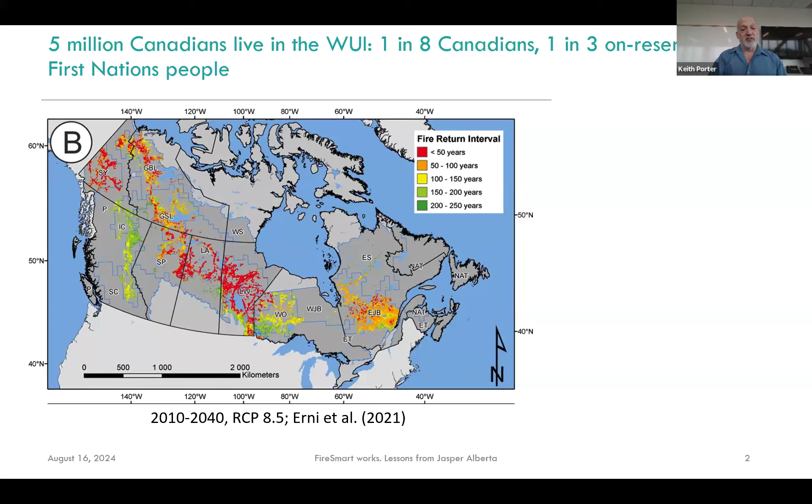So the red dots are places where there is a wildfire in the wildland-urban interface at least every 50 years. That is to say, there's a 2% chance in any given year that a place in one of those red dots is going to have a fire. A yellow dot means roughly 1% chance, and a green dot means roughly 0.5% chance. So we're talking about fairly likely outcomes when you consider that there are a lot of places in the wildland-urban interface. So we can expect to see wildfires affecting communities pretty frequently.

The key features of wildfire resistant homes, the features that FireSmart advocates and that other experts advocate, are shown in these two pictures. The one on the left is mostly focused on what we do to the building. The one on the right is mostly focused on what we do to the yard and the landscape around the building, the vegetation around the building.

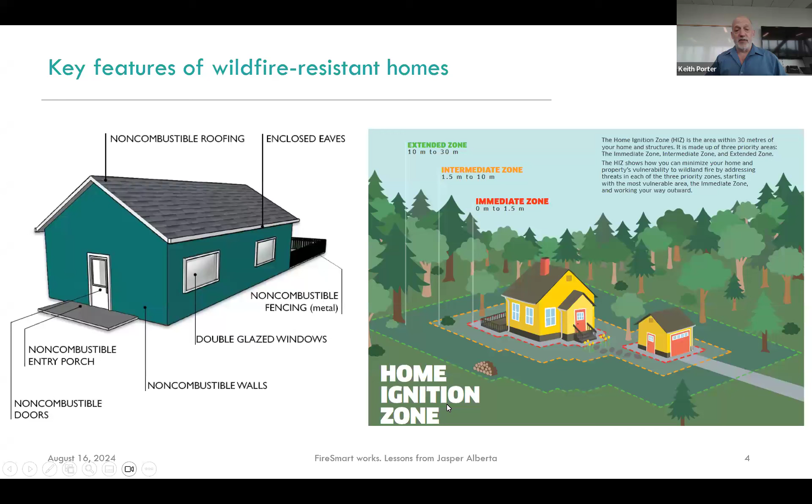I'm not going to talk much about the extended zone that goes out 10 to 30 meters, because few if any of the houses in Jasper had any control over what was going on in the extended zone. Now, I'm going to tell you lessons from Jasper, but there's really nothing new in those lessons. We have seen over and over again that where we apply those principles, the buildings survive.

The image you're seeing right here is from the 2018 Paradise wildfire in California. It is the home of the Hare family. The building that is in the lower part of the screen complied essentially with all the same requirements that FireSmart calls for. This building was governed by the California Building Code, but the California Building Code uses many of the same requirements as FireSmart does.

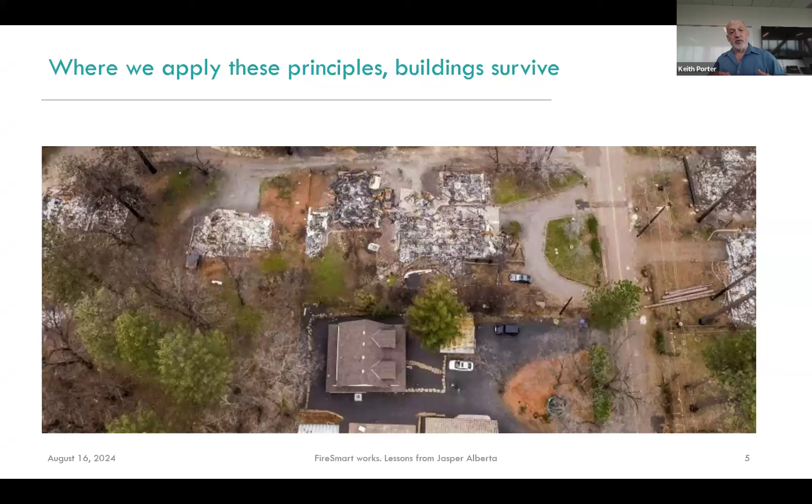You can see that all the nearby buildings, the buildings that surround that house, have burned down. They were all inside the wildfire perimeter, but the essentially FireSmart house survived, and the rest of the houses did not. This is the Hare family on the left, Dawn Hare and her son Liam, and on the right are Oni and Donna Carroll. Their houses are in the background; they had basically the same experience as the Hare family. Their homes survived, where the neighbors' homes did not.

All of the principles that I just told you about from FireSmart, they're mature, they're well codified. Versions of them appear in Canada's National Guide for Wildland-Urban Interface Fires, and in the United States in the International Wildland-Urban Interface Code and the 2022 California Building Code. There's no bleeding edge aspect to these features. They're all well established, well codified.

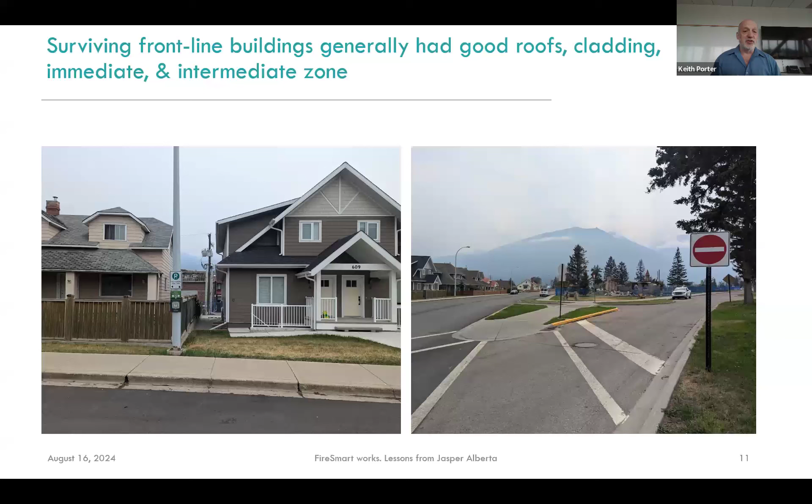The immediate zone, once again, is that 1.5 meters immediately adjacent to the house, and the intermediate zone is the space around the house from 1.5 meters away to 10 meters away. So, the picture on the left is a couple of houses right across the street from a block of buildings that burned down. All the buildings that survived on the left side of the street, seen close up in the left-hand picture, had many or all of these desirable features, and we believe that helped them to survive.

So let me give you about 3 examples of buildings that survived that were adjacent to buildings that did not survive. So here is a stucco and stone-clad house on Poplar Street in Jasper. Beautiful house, and it has these desirable features. It has a non-combustible roof. That's the asphalt shingle roof that most homes in Canada have. But that roof was free of combustible debris. There were no dead leaves, no pine needles, etc. up there.

There was metal flashing at the roof gutters so that any debris in the gutter couldn't ignite the wood underneath the shingles. There were metal gutters and downspouts so that they couldn't ignite. And the eaves were enclosed. What I mean by enclosed is you can see in the left-hand picture these horizontal lines underneath the projecting roof; those are metal panels that prevent embers from getting up into the beams that support the roof and igniting those beams. They also reduce the chances for hot gases to get up there and ignite the underside of the roof. So that's what enclosed eaves are, and this house had them.

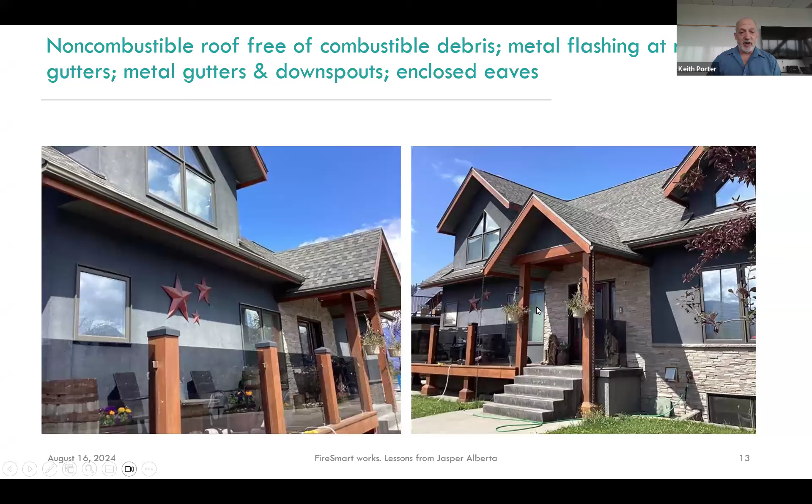So that's about the roof. Let's look at the siding now. The siding on this house was non-combustible. It was made of stucco and stone. And the bottom 15 centimeters at the wall base was also non-combustible. So had there been grass or something next to the wall, it wouldn't ignite that 15 centimeters at the wall base. And also all the glazing had at least 2 panes.

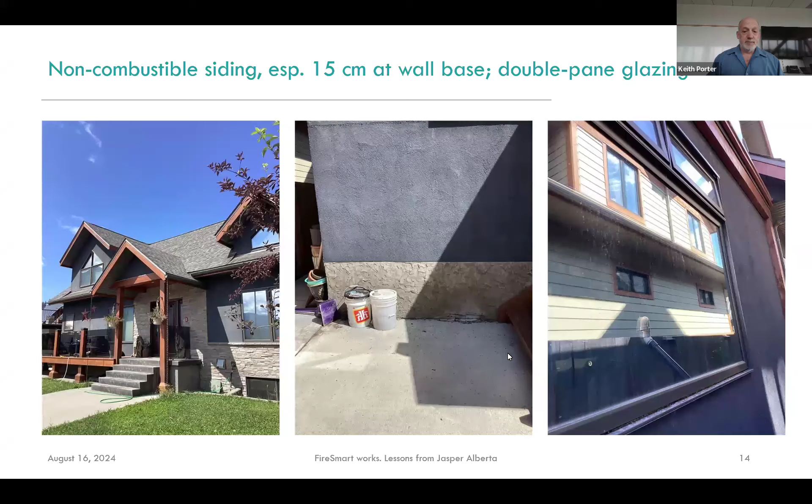So that's the cladding. And then the third piece you'll remember that is key to preventing ignition is that immediate zone, the 1.5 meters immediately adjacent to the house, and that is non-combustible. There is a good separation between the grass and any vegetation away from the house. And you can see that there is a metal gate here that encloses the yard so that the wood fence doesn't touch the house.

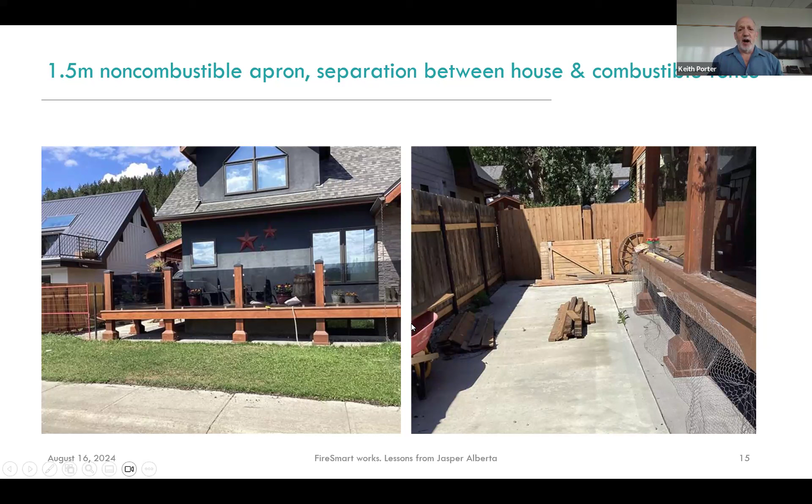And in the intermediate zone, that's the space between 1.5 meters and 10 meters away, you're allowed to have vegetation. You just have to maintain it. The grass is less than 10 centimeters tall, and there's only deciduous trees in that intermediate zone. They've all been well pruned.

There is metal flashing at the gutters. That's just a little piece of metal that's right underneath the bottom edge of the asphalt shingles that covers any wood that might be adjacent to the gutters. And then there's metal gutters and downspouts that can't ignite. And once again, the eaves are enclosed.

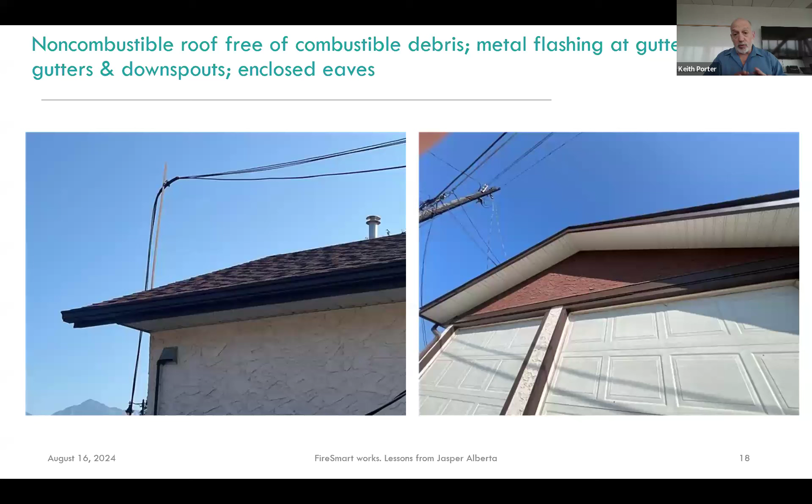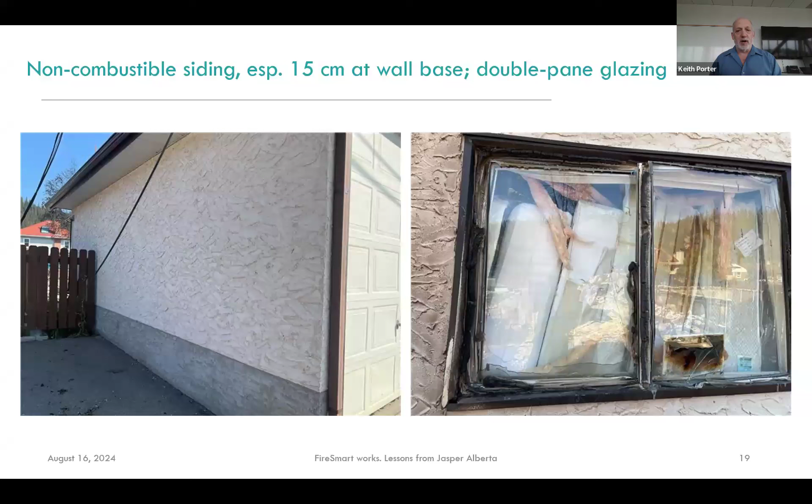Moving down the building, this garage had non-combustible siding. In this case, it was stucco with concrete at the bottom. Once again, nice clear 15 centimeters at the wall base. All the windows had double pane glazing. So despite the fact that there was all this combustible stuff right inside the window, and despite the fact that there was damage to the window frame, the double glazing prevented ignition to the material inside the windows.

Another little feature of having non-combustible cladding is to make sure that all the vents have mesh covers that are closely spaced so that embers can't get up inside of the wall and cause ignitions.

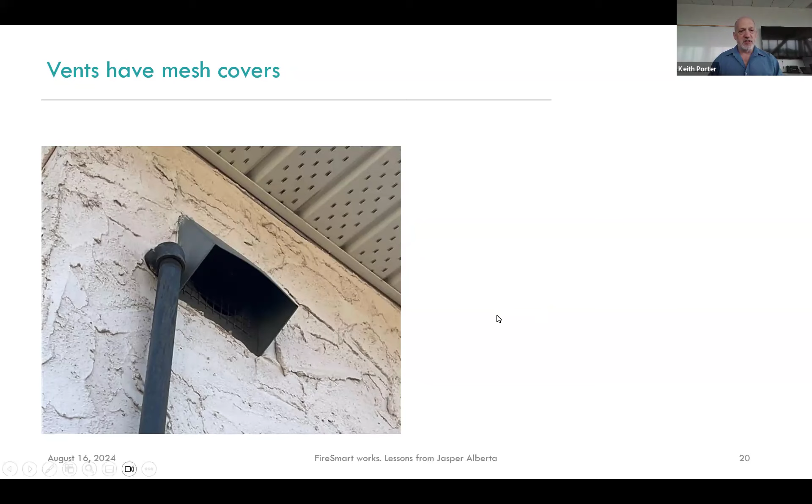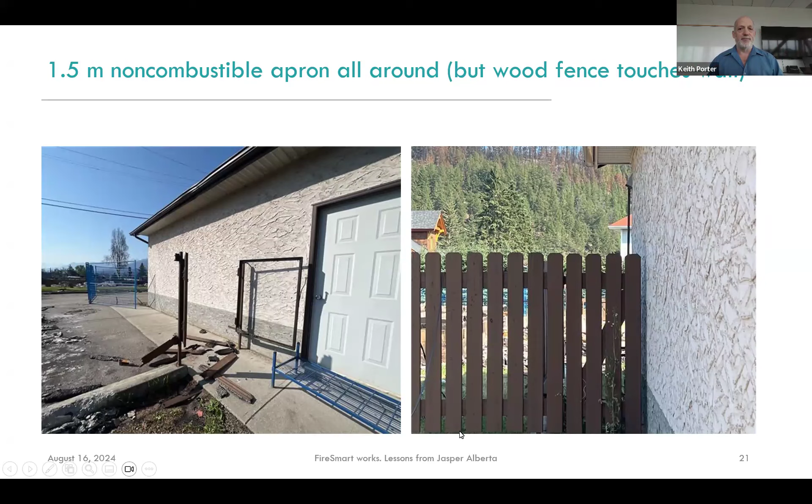Looking a little bit farther from the house, there were only deciduous trees in that intermediate zone. There was no juniper or cedar, that's highly flammable stuff, and the grass was trimmed to less than 10 centimeters.

And then I think this is my third example of a survived house. This is a fiber cement clad house on Miette Avenue. Starting at the top again, non-combustible roof that was mostly free of combustible debris. There was some vegetation up there, some moss and stuff. There was mostly metal flashing at the roof gutters. There were a couple of places where the flashing was missing.

This house did have metal gutters and downspouts, but it wasn't perfect. The owners seemed to be in the middle of a renovation, and they had recently put on the fiber cement siding, and in order to put it on, they had to rip off the eaves. We don't know if they were going to come back later on and put those enclosures back on. The eaves had been enclosed, and we saw evidence of where those metal panels had been cut off to make room for the renovation, to allow the builders to add on the Hardie board, the fiber cement cladding.

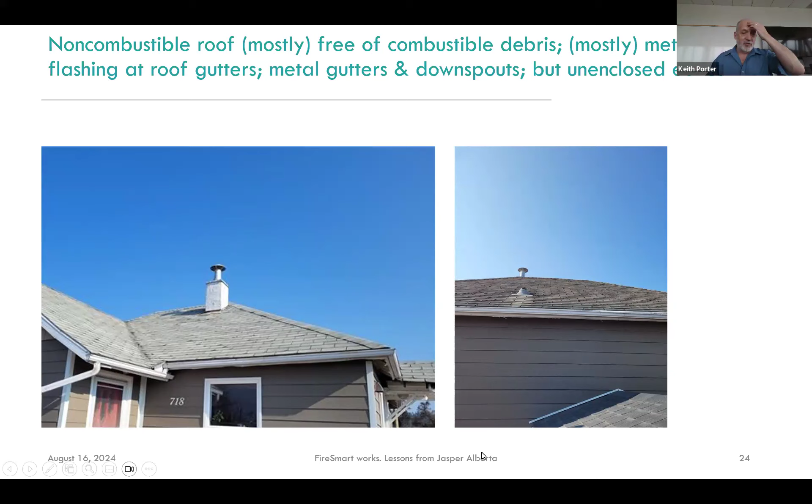So here you're seeing a close-up of that fiber cement cladding. It looks just like wood. You can't really tell the difference unless you walk up and knock on it. But it's non-combustible, and there's that 15 centimeters at the wall base that is concrete, non-combustible, and the windows all the way around were mostly double paned. There was one window that was single paned.

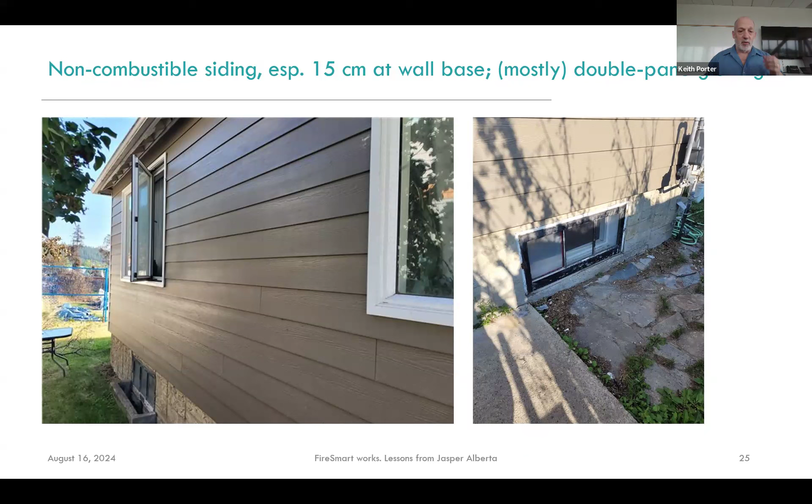Looking into the vegetation management. The non-combustible apron was, well, it was mostly non-combustible. There was grass right up to the edge of the building, but it was well trimmed, less than 10 centimeters tall. So not ideal, but in this case, worked out all right.

Okay, so those are the three examples of surviving houses that I wanted to emphasize, those big three parts. I emphasized the roofs were non-combustible, the siding was non-combustible, and the vegetation in the immediate zone and the intermediate zone were all well maintained. Now I want to talk about some other lessons from Jasper that kind of emphasize how important protecting the immediate zone is.

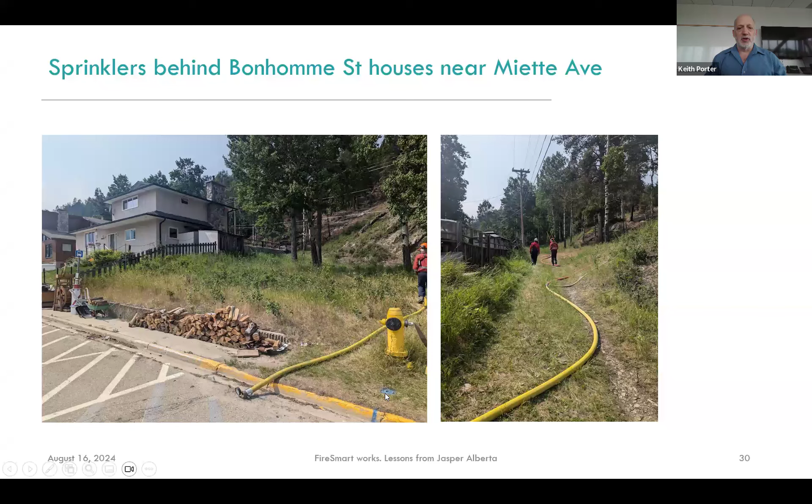And that long hose is run for several hundred meters behind the houses, between the hillside and the houses. And there were sprinklers attached intermittently along the length of hose. So let me show you a little bit farther along there. So this is about 100 meters from where we were just standing, where the hose reaches up behind the second or third house down. And I'm looking up the hill.

The fire was spreading down the hill toward the houses, and it is stopped where the sprinklers were running, spraying water and cooling the vegetation and preventing ignition. So this is a place where, without these sprinklers, that fire almost certainly would have reached those houses.

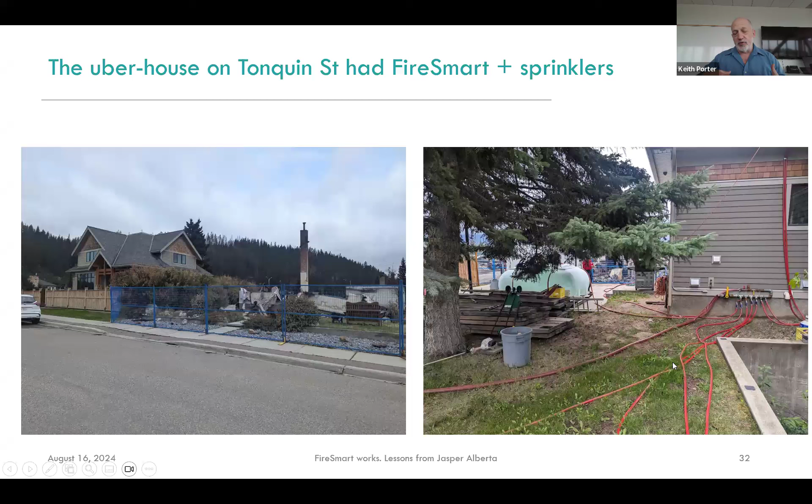Sorry, wrong screen again. There's the 5,000 gallon tank of water, and there's a manifold. This wasn't just put up at the last minute. This had been installed deliberately long before the fire came along. And a manifold simply takes the water from that tank and splits it so that you can attach a bunch of hoses to it. And that's what you're seeing. So there's one hose that comes in from the tank, connects to this manifold, and all these hoses come out to distribute the water to sprinklers all around the house.

So here's what those sprinklers look like. Sorry, we're in the right-hand picture. You're seeing a little bit more closely the manifold. You can see that there are hoses that go up onto the roof. There are sprinklers up there. In the left-hand picture, there's one of those hoses, and this little dot here is a sprinkler that had sprayed water onto that wood deck. There were, I don't know, 6, 7, 8 of these sprinklers sort of ringing the house.

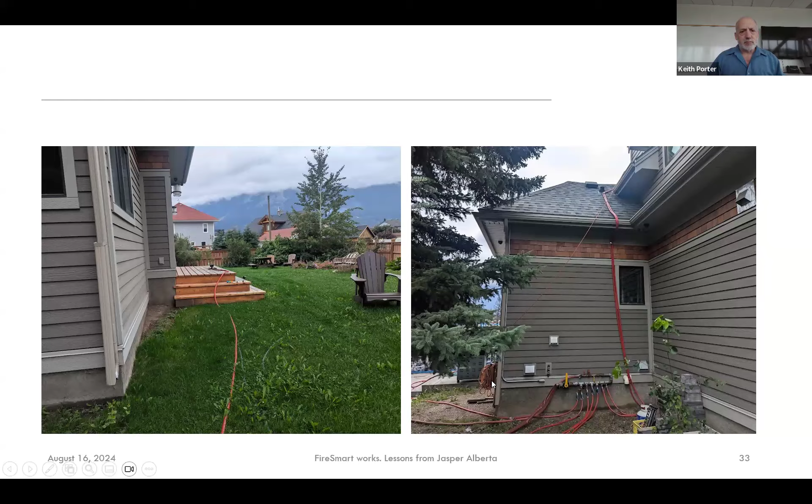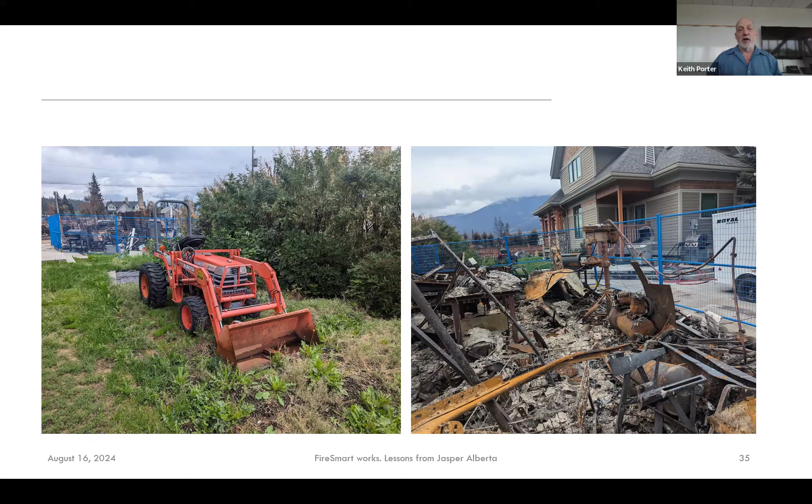There was stuff in the intermediate zone, the 1.5 to 10 meter zone, that was combustible. As a matter of fact, the right-hand picture is showing the garage that was attached to this house. It was not protected in that way. It was a wood shop and metal shop. There was lots of combustible fuel. It wasn't protected, and it burned down. But despite the garage burning down, the rest of the house survived. So those are just a couple of points I wanted to make about the efficacy of sprinklers.

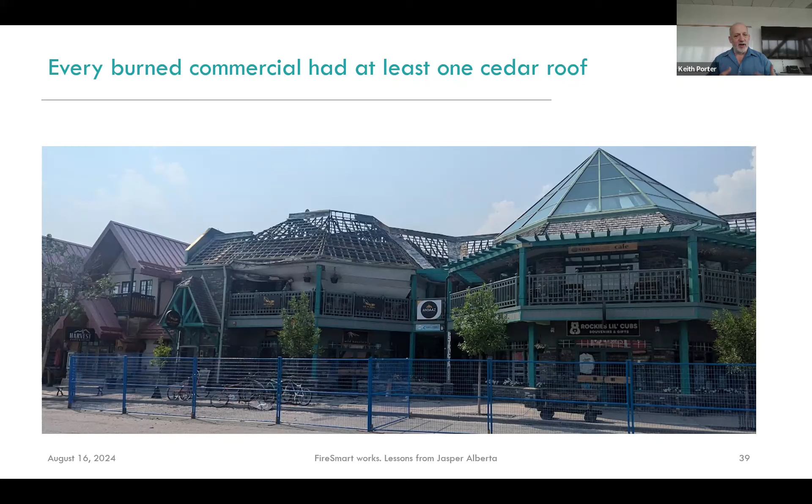Okay. So as I just said, every burned commercial block had at least one cedar roof, and Ray mentioned the debris in the street. We saw pieces of partially burned cedar roof where the cedar shingles were, I don't know, the size of my phone here, partially burned. So picture these things, and these were embers that were in some cases flying through the air. So that's just another point about how embers can ignite the intermediate zone and the immediate zone. So all the embers from this burning roof could have ignited nearby buildings.

So just to recap, FireSmart features seem to greatly reduce ignition. I've made sort of four points here. Number one, the surviving frontline buildings tended to have non-combustible roofing, non-combustible cladding, and well-protected vegetation, especially in the immediate zone. Point number two, ground fire spread caused a lot of ignitions. So the immediate zone and the bottom 15 centimeters of non-combustible wall mattered a lot.

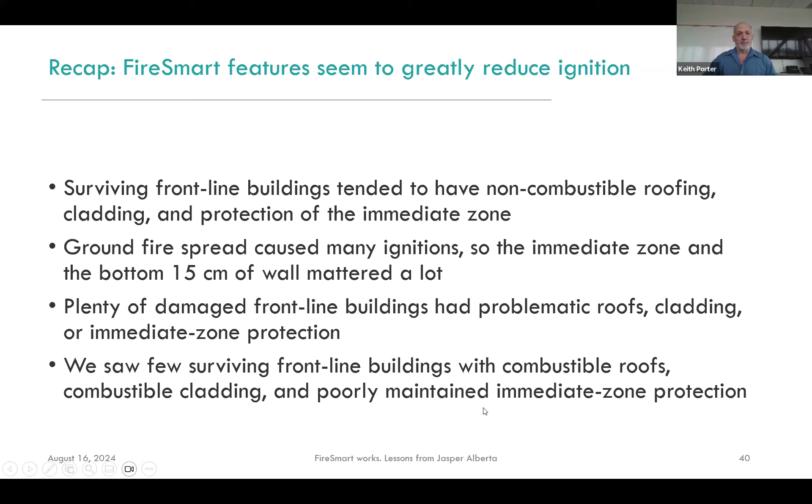Lesson number three, there were plenty of damaged frontline buildings that had problematic roofs or combustible cladding or bad vegetation management in the immediate zone. And fourth, we saw very few surviving frontline buildings that had bad features. Few surviving frontline buildings had combustible roofs and combustible cladding and poorly maintained immediate zone protection. Okay, so those are the big lessons that I wanted to offer you today.

And I want to emphasize that, although I, as a researcher, am always interested in learning more, the effectiveness of FireSmart is absolutely certain. Science is never done. Don't let anybody tell you that because engineers and scientists don't know everything, that means that FireSmart is not a good idea. FireSmart effectiveness is certain. We can always learn more. Science is never done, but that does not shed any doubt on the effectiveness of FireSmart.

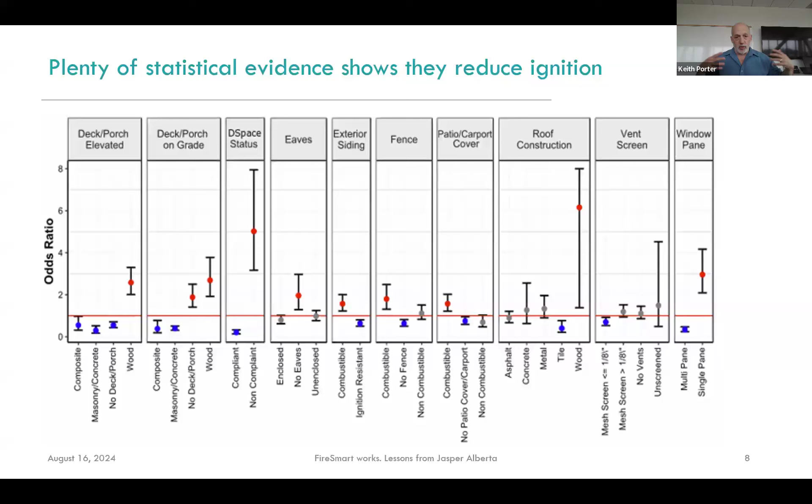I think what you're seeing here with no eaves having an ignition odds ratio of 2-to-1 is that buildings without eaves tend to be inherently combustible, like they're manufactured homes with combustible siding. I suspect that that's what's going on there. I've noticed that myself.